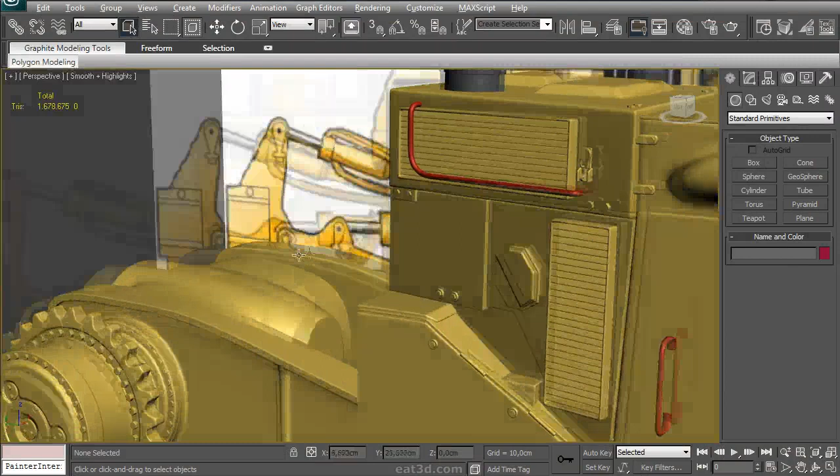In this video, we'll be creating the covers for the track on the side of the bulldozer, below the cabin. As you can see on this reference picture, there are quite a few details attached to it, and we need to create this first before we can start on the cabin, as a sort of base to work on.

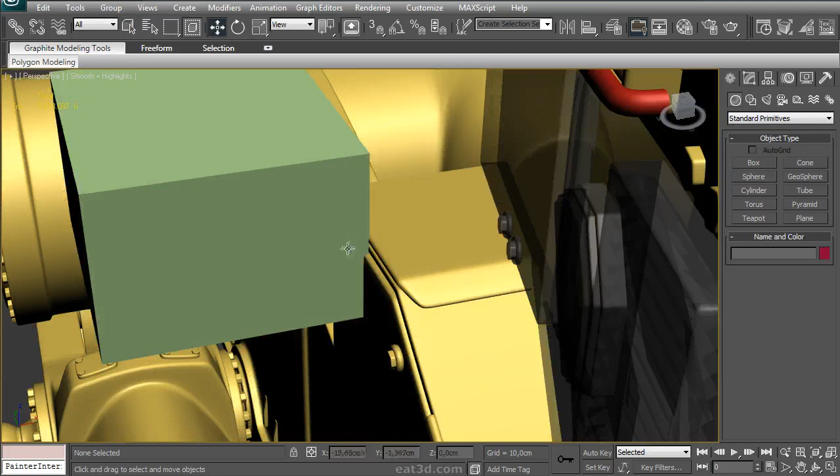I'm going to start off with a simple box shape as a starting primitive, and I want it to sit flush next to the hood of the bulldozer, so I've enabled that again. Then just moving it, and I'm comparing to my block out to see how big exactly this should stick out to the side.

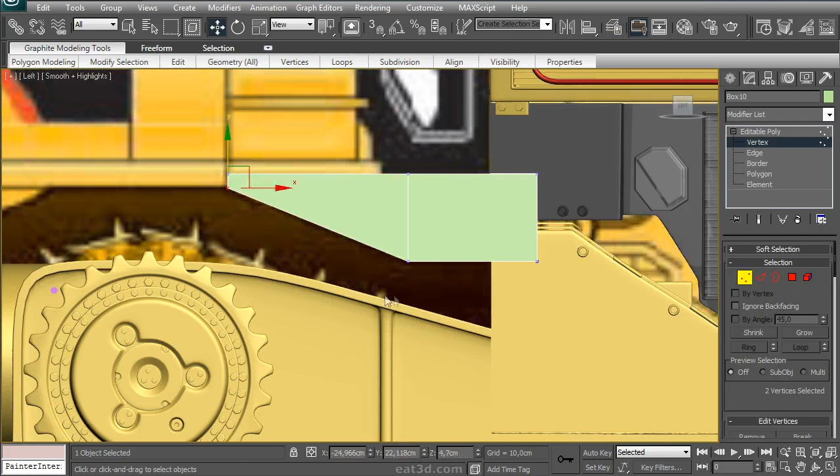Once that's done, I'm going to start doing some simple poly modeling to get the shapes in the correct position. This really isn't anything difficult. It's almost the same as the block out, but this time we're doing it really exact and correct.

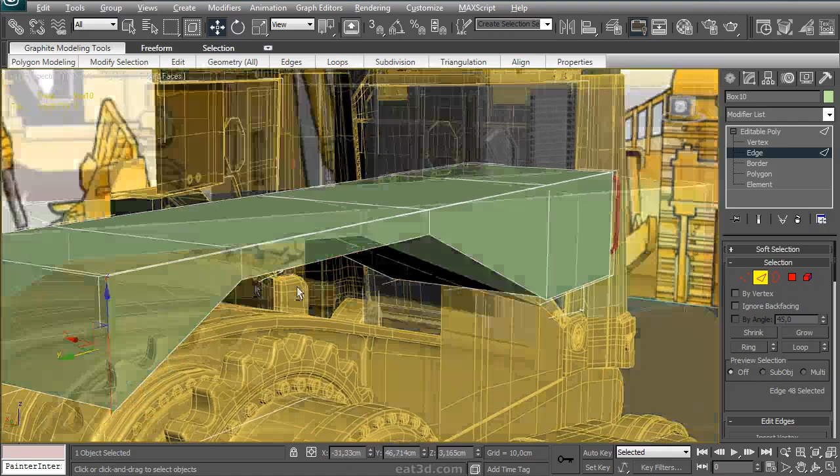After that, I select the sides and duplicate them. Since this part is made up out of a lot of metal plating, I want to build it up the same way in my detailed high poly.

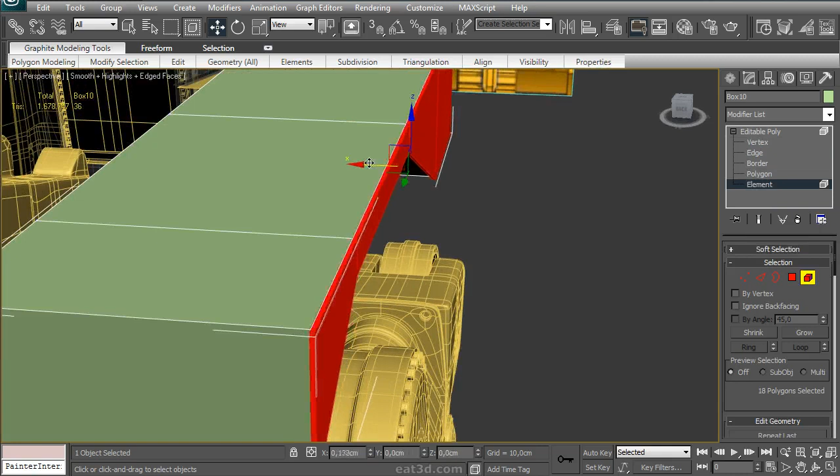So I'm selecting this part and extending the edges slightly so that I can get it to look exactly like metal plating. Then I'm duplicating the inside, and once that's duplicated, I'm moving it and attaching it to this part so that I actually have a thickness on that metal plating on the outside.

With that done, I'm using the Swift Loop tool again to quickly add a few subdivisions, adding these around.

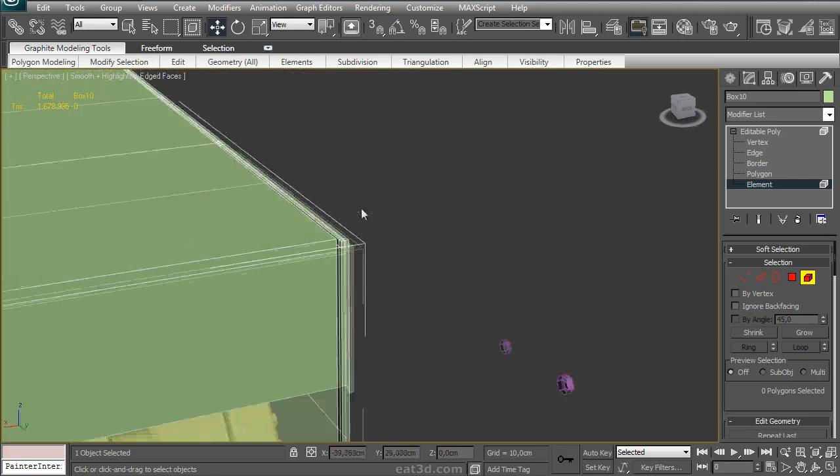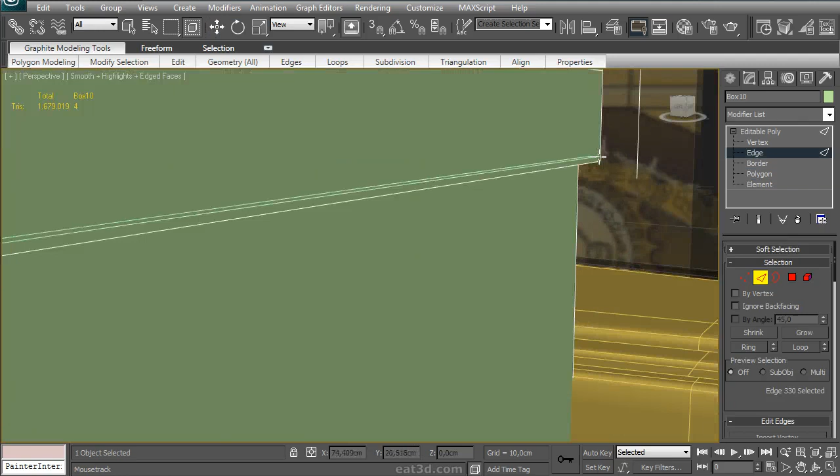After that's done, we're going to do a little detail here at the front. There's a sort of detail that looks like the plate is bent around the front there, and I've created that by simply extruding. Once it's extruded, I'm adding the extra edges that will support the geometry. I'm adding these later in because if I had done them beforehand, it would have been more work and more difficult to extrude.

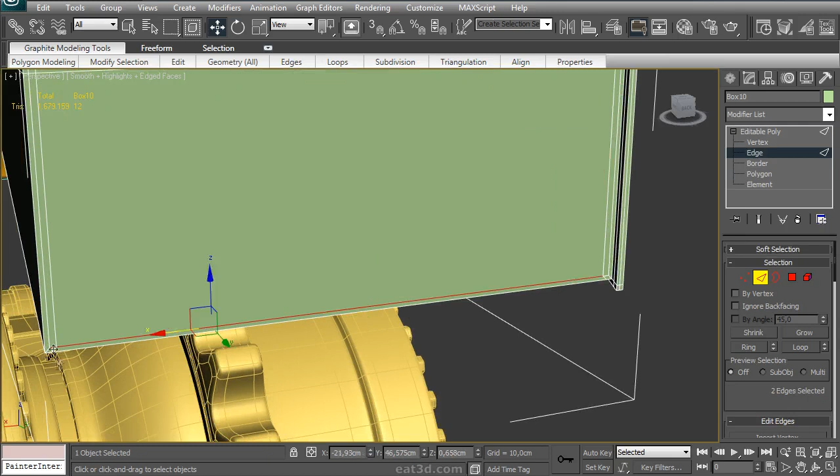Mostly on the back side, because as it currently sits, the back of these track covers is actually open. There's an opening there, and inside that opening the actual rear lights, tail lights of the bulldozer sit. So what I'm doing here is simply adding some geometry so that I can model this in.

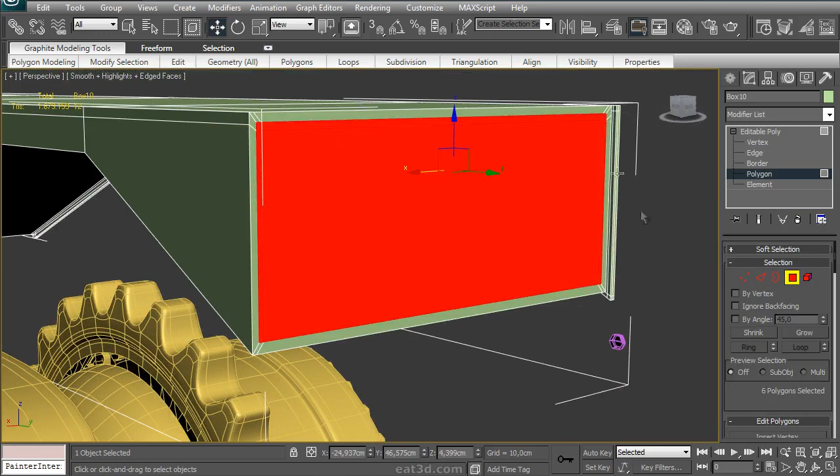I'm just extruding that inwards, then moving it up so that it doesn't intersect with the other geometry.

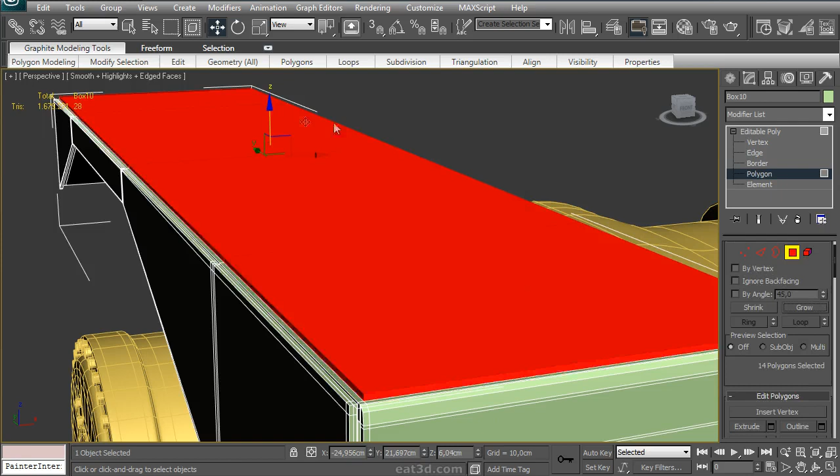That done, there's also a metal plate on the top of this detail part. So I'm doing the same trick here: selecting the polygons, shift-moving them to duplicate them, and then performing an extrude.

Again, on a few parts of these, there's an extruded part that bends over the side. So that's what I'm doing here: using an extrude, a few rotates, and a little bit of scaling, which makes it easier to create that bent-over look.

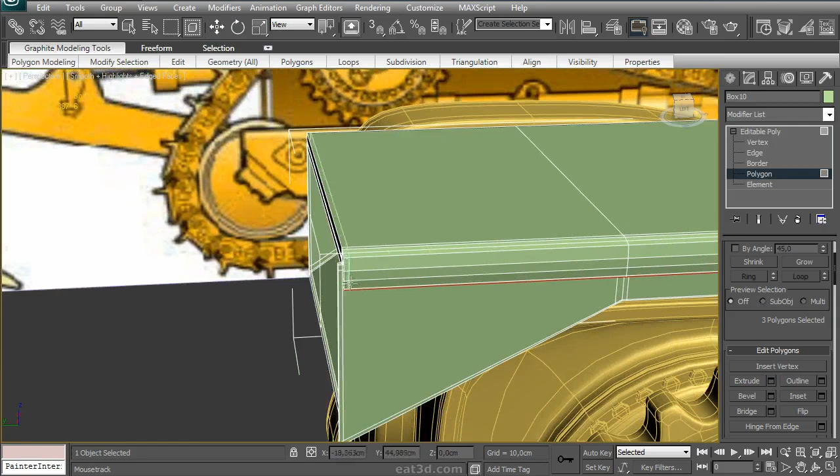That done, I'm adding a few final parts and a last extrude to get the supporting edges in there. After that, I'm using the Swift Loop tool again to add the final supporting edges. This is all pretty simple, you just gotta make sure you do things in the right order.

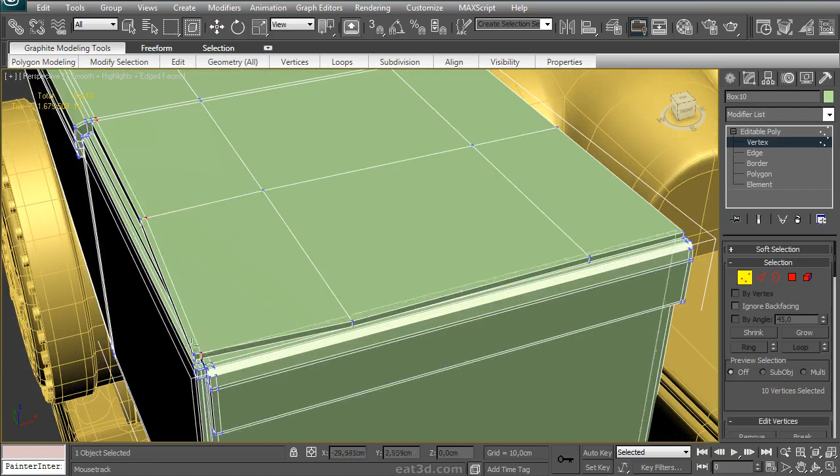One interesting thing I'm doing here is moving a few of the verts around so that it doesn't look too perfect, too tight, and too clean. If I look at the reference pictures, a lot of these plates are just slightly bent, they're not mounted exactly in the best way possible, so I'm adding a few of these details.

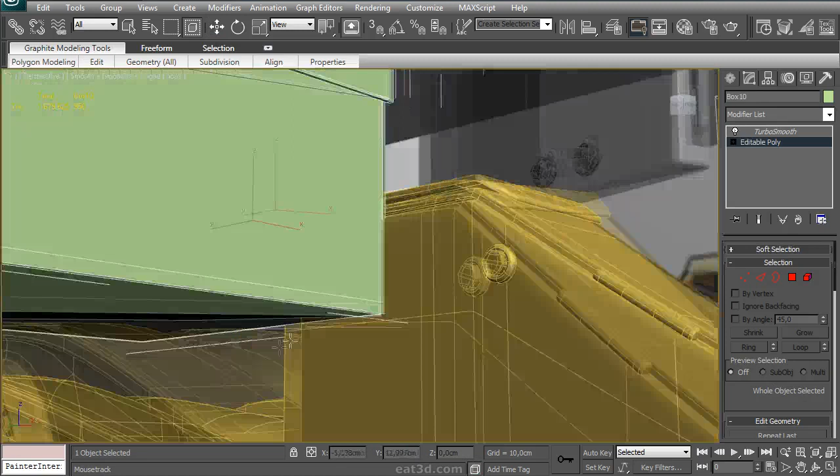There we go, and add some at the bottom. There's an amazing amount of supporting geometry you have to add most of the time, so it helps to use a tool that lets you do this as quickly as possible, and that tool is Swift Loop.

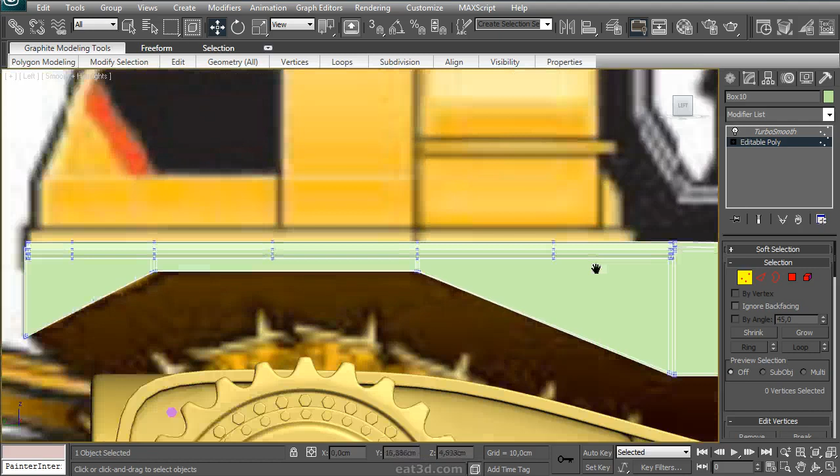Adding a few more here, because I want some subdivisions in there. So I have those selected, I want to move them down a little bit more, just be a little bit longer at the bottom there.

And there's my basic shape, so I'm just going to change the color now. There's quite a few details attached, so I want to create those as well.

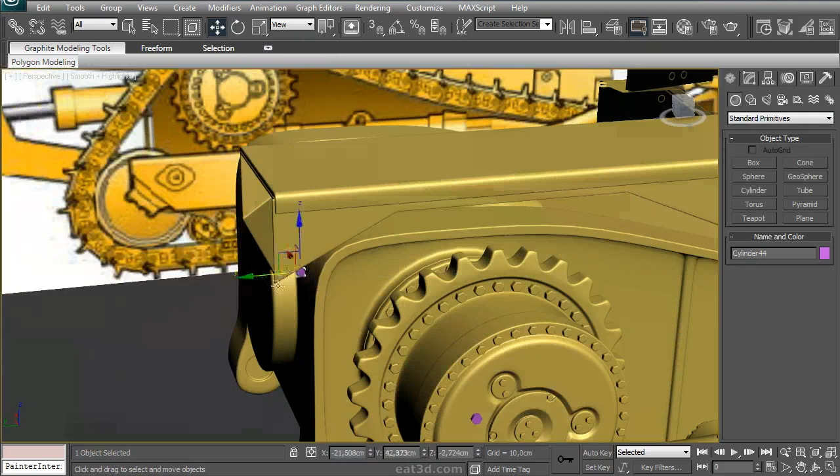We're going to start off with the old favorite, using the same nut model that I've used so many times before. Same trick all over, just duplicating it, attaching it, whatever. You've seen this before.

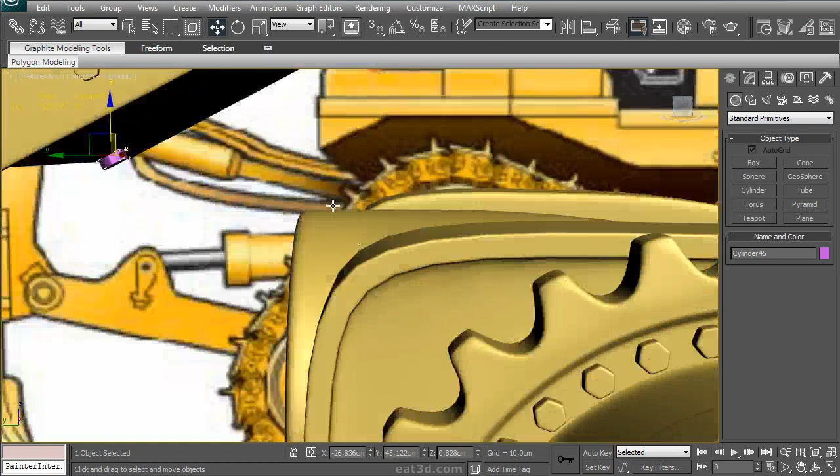The same trick to make it easier to put it on sloped surfaces: just create a cylinder with AutoGrid first, and that way you can get it nicely aligned to your surface. A few random rotations, I think this is important to not make it look too fake.

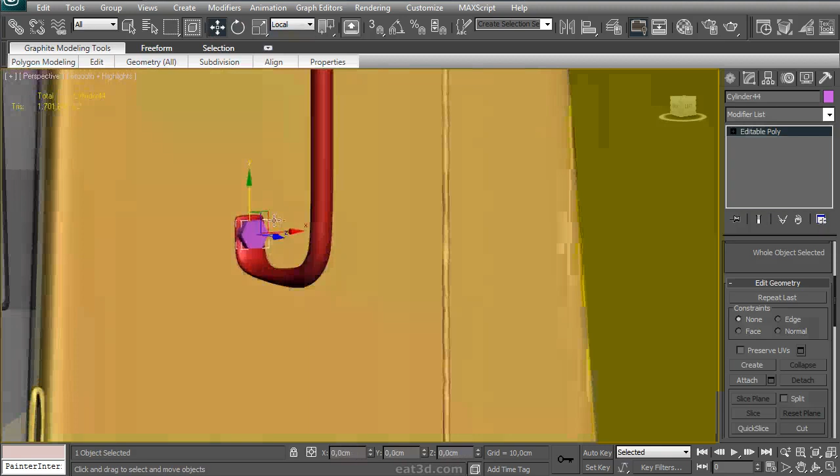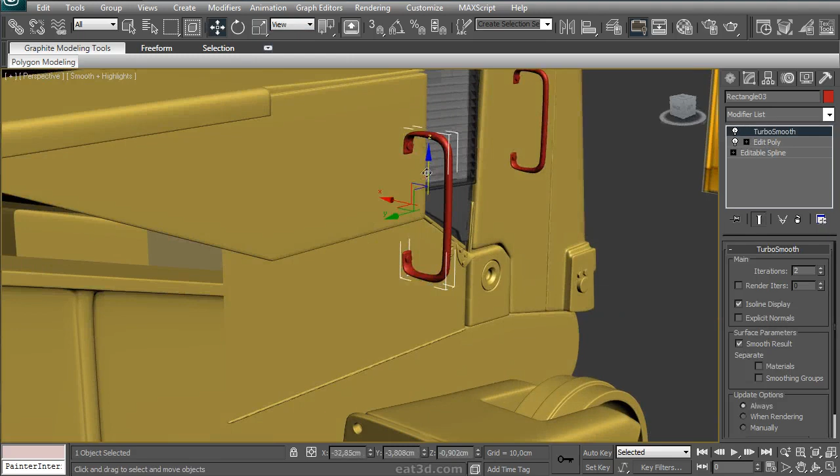I'm going to do another duplicate. I just spotted that on these handles, these bars at the front, there should also be a nut to fasten them onto the hood of the bulldozer, so I'm quickly creating this. I know I'm jumping to another part here, but if you see a detail that isn't right, just jump to it and fix it—don't postpone that sort of stuff. Another reason I'm doing this is I want to use the same handles on the side of the track covers, just modified slightly—they're not as high, and their shape is slightly different.

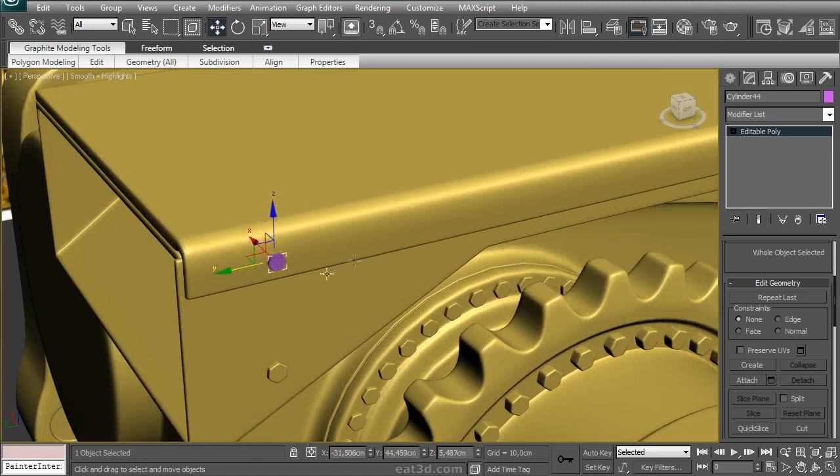The plate that's bent over the side is also fastened with a few nuts, so I'm just going to duplicate these nuts here. Always, when I duplicate multiple times, use more than I'm sure it will need. The reason for that is you can just delete the extra ones, while it's harder to get new ones in there with the same spacing.

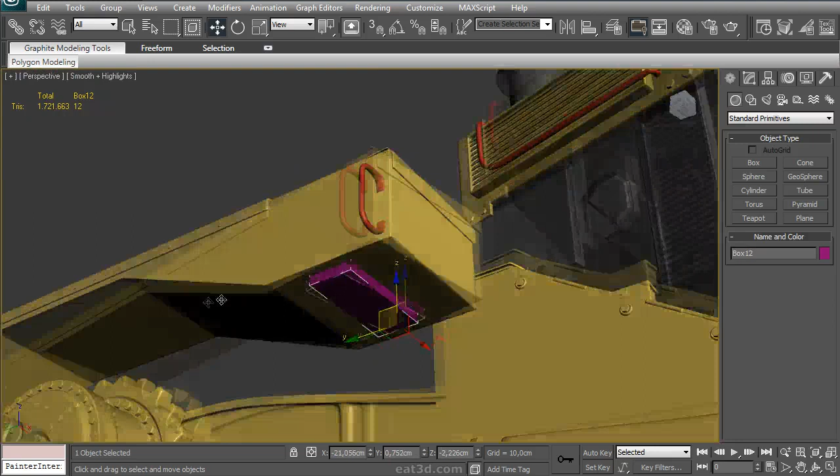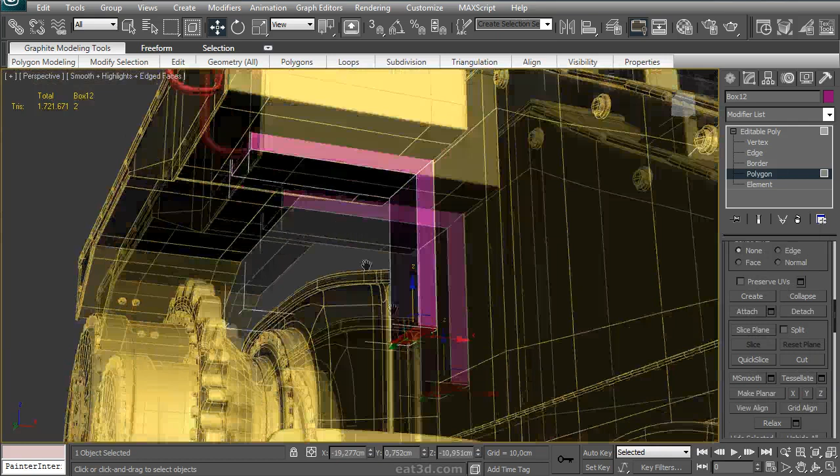Here's another extra part, and what this is for wasn't very clear on the reference, so I'm almost making this up myself. It's a sort of support part that holds up the track covers. They need to be attached to the side in some way, so I'm creating this L-shaped profile that simply holds up the track covers on the side. I'm trying to make this shape slightly interesting—nothing too special, it's an inset.

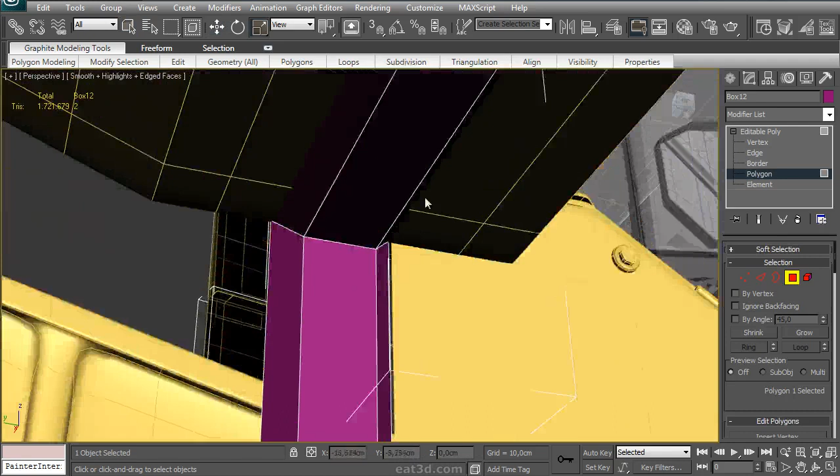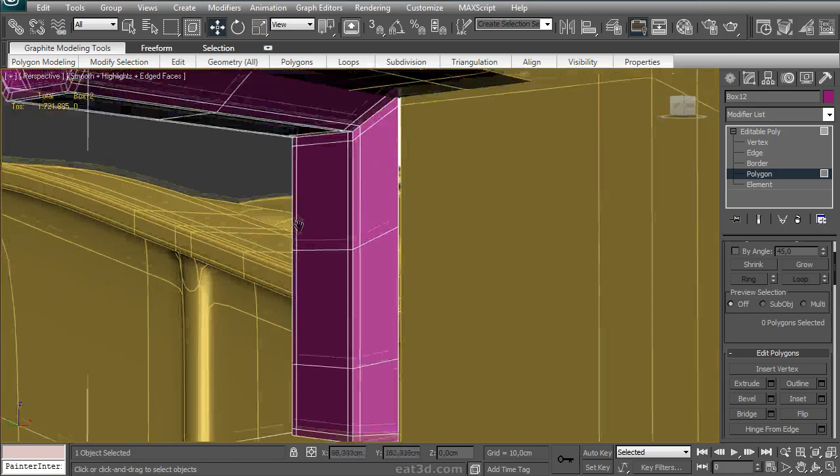I'm deleting these because I don't want to get that rounded shape in there. Move these in like that, then perform an extrude—actually multiple extrudes—and then use my Swift loop to add the extra supporting geometry. I'm adding a few subdivisions here so TurboSmooth doesn't have a problem with the low subdivision of these surfaces, then making a few adjustments to get this shape more interesting—scaling it down slightly, moving it up. That makes it more interesting than just straight on straight.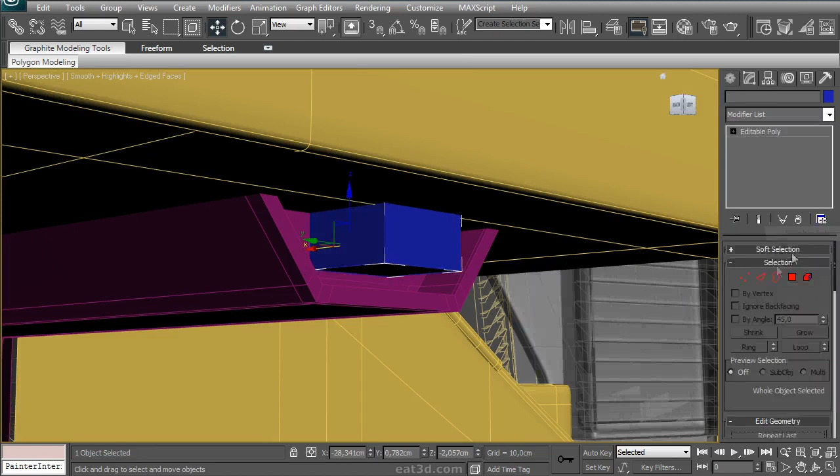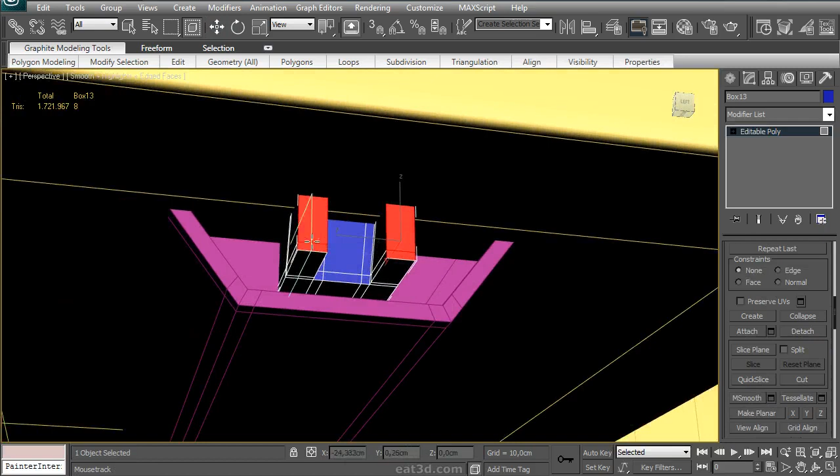As a final detail, I'm adding this small box shape on the inside, deleting the back, moving it in a little bit, and adding a few subdivisions. Move these out, then perform an extrude of 0 and move these manually. Then use my Swift loop to add the final detail to these shapes, and delete the top. With that done, you can go back to the main shape and select and attach that part. So that's our little detail made there.

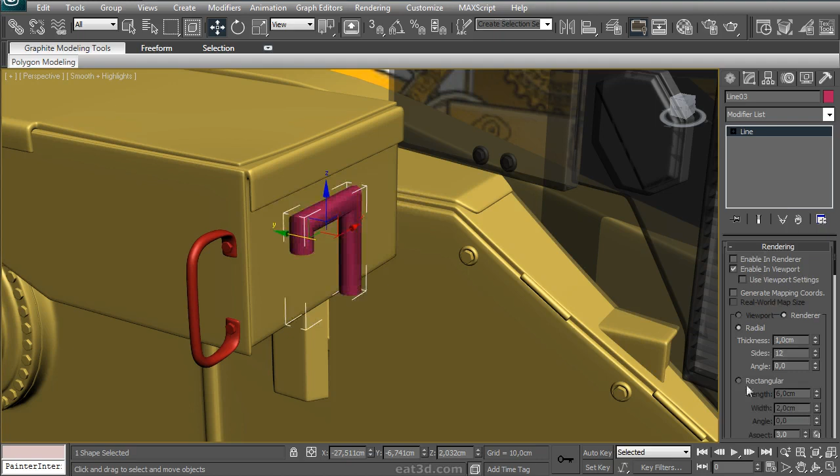Now we also have to create a detail at the front, and I'm starting with a spline here. I've drawn this sort of incomplete rectangle, and I'm slightly adjusting the thickness and width so I can get the right shape out of this. You could do this with box modeling, sure, but I'm just using a spline here because it's quicker in this case for me.

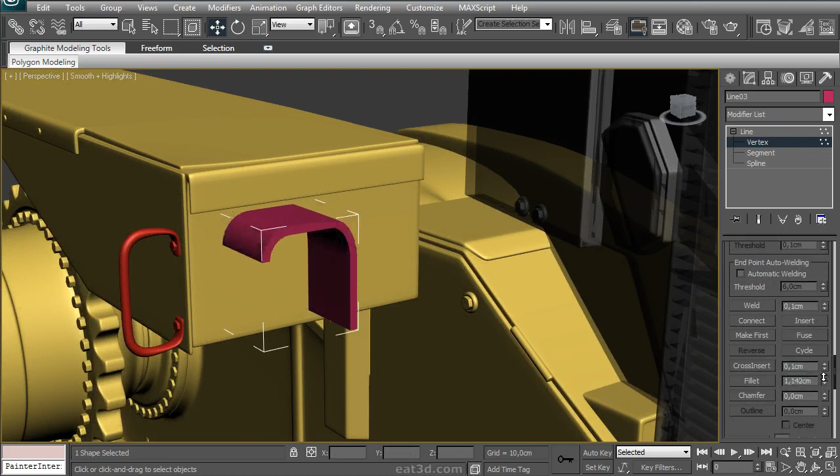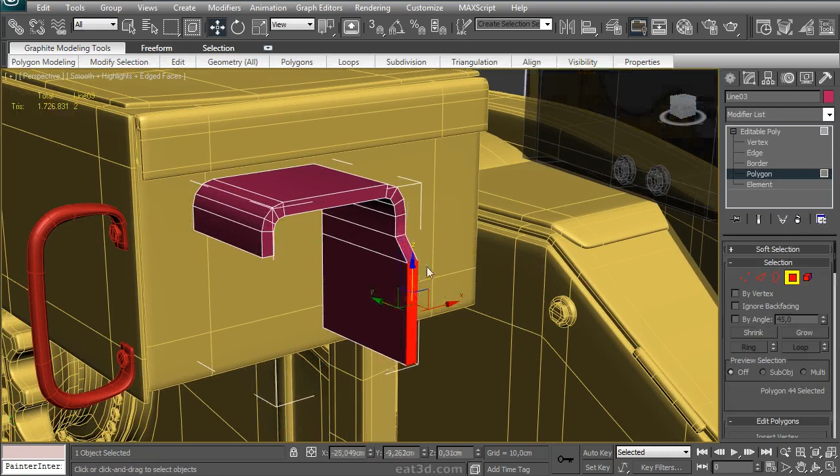You simply select these top points and go down to the fillet button, then manually round off these corners—I think it's just easier. Change a few of these settings, that should be about right. Convert into an editable poly, then add a few subdivisions to edit these. You've got to remember when you create a spline, there's always a triangulated polygon on one side, and you've got to get rid of that. It's kind of annoying, but I don't think there's a setting to turn this off—not that I've noticed in the past 4 years.

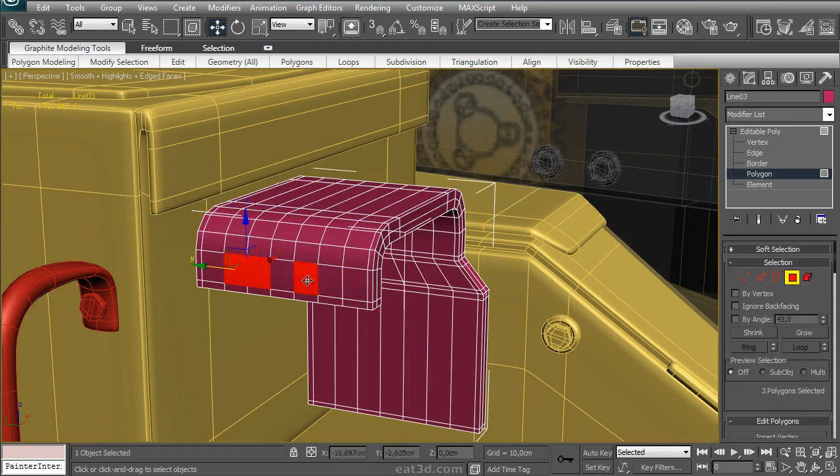So there we are, add a few subdivisions, and this has a specific reason—there are some holes in the side of this part. There's actually 2 times 2 holes, and we're going to create these with the subdivided version. Once I've attached that, you can see those holes at the side. Now this cover protects one of the lights on the bulldozer from, I guess, rain, so I'm going to model the light that's in there.

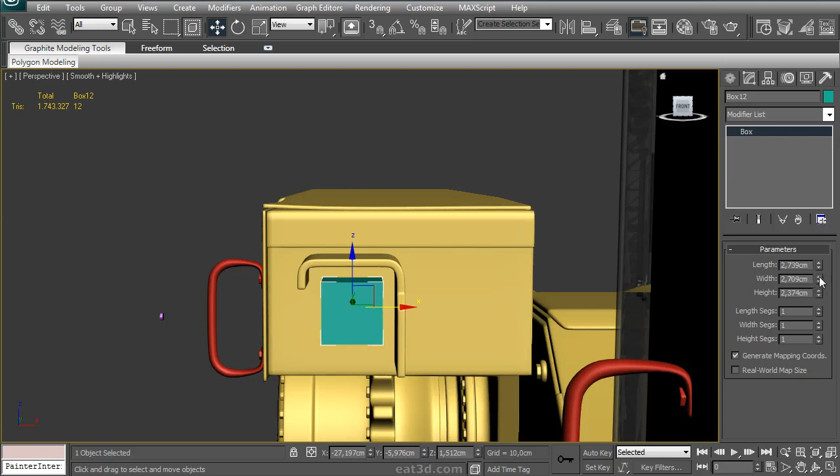This is a pretty simple shape, just a box rounded with a few bevels and insets. I'm using chamfer to add rounding to the box, then just selecting these vertices manually and connecting them. That way we don't have any n-gons, which is better for our subdivision modeling—TurboSmooth doesn't have any problems with that.

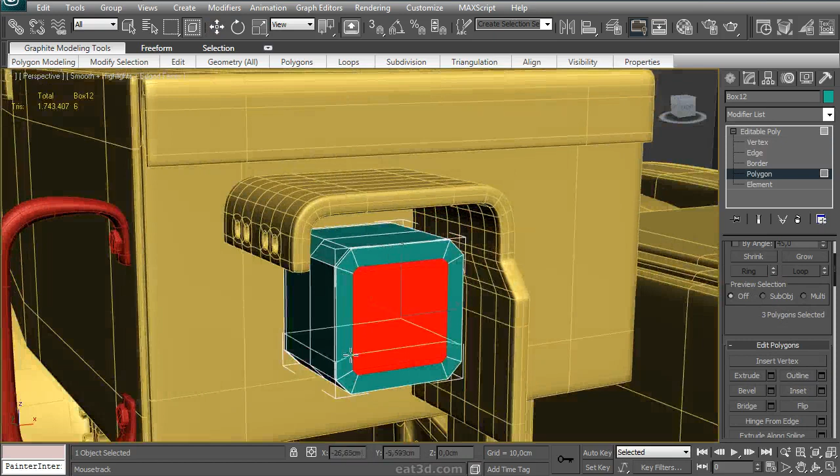Now I'm just roughly adding in a few shapes. As I said, there are a few insets here and there, and this part's actually extruded for this nicely beveled edge around. Then at the front here, we want to give the actual lens part of the light an interesting shape also. All I'm doing here is really simple stuff—just combining insets and scaling.

Now, there are some slight problems when I'm insetting this shape too much, so I'm just using the scale tool to fix that. There we go, that looks better. Once that's done, I can just attach it. There we are.

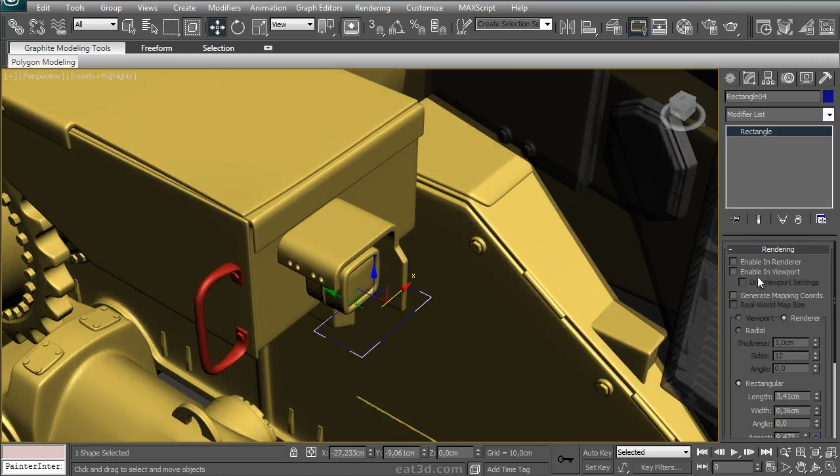With that attached, it's time to move on to the next detailed shape, and there's a sort of protective guard around the front. It's also a good idea to start from the spline here, make it a little bit less thick, and add some fillets to the corners. There we go, that looks about right.

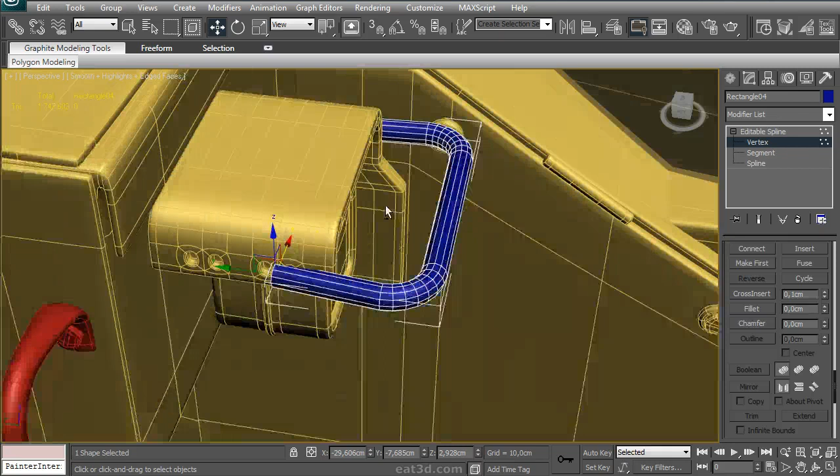Move these in slightly, and reduce the interpolation, and of course the number of sides. You shouldn't have too many when you convert from a spline to a polygon.

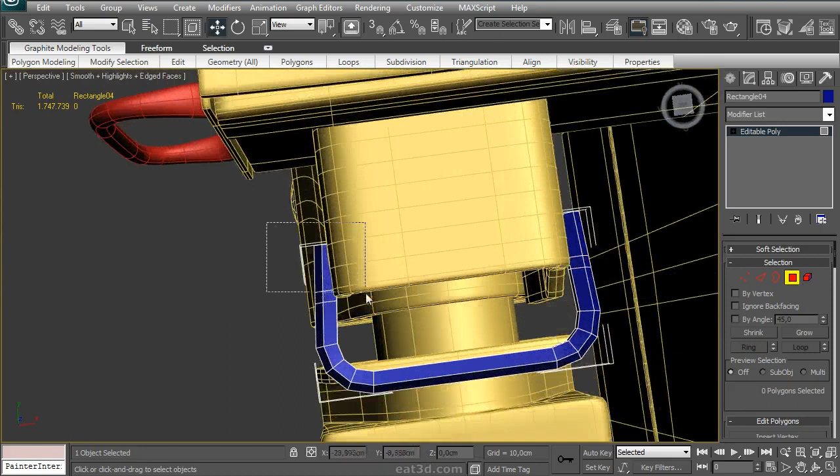I'm just flattening these parts out to reflect their shape in real life. These are bent metal bars, and the ends are sort of squished, which makes it easier to attach them, and I think also more solid to attach them to the main part of the bulldozer.

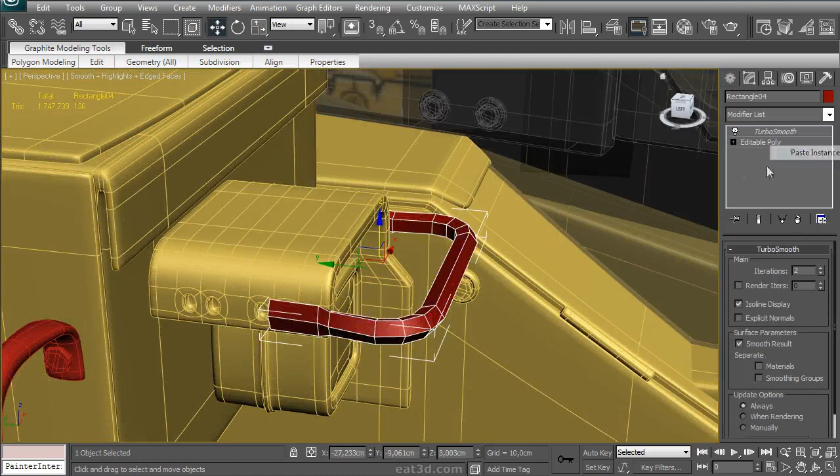With that done, I'm going to scale these up also. It reflects the squishing of the real part. And of course I can't forget to add my supporting edges at both ends. There we are.

I think this could do with being a little bit thicker, it seems a little bit thin. Well, there's an easy way: just add a push modifier and collapse it down, and there you go. Looks a whole lot thicker and a lot more sturdy.

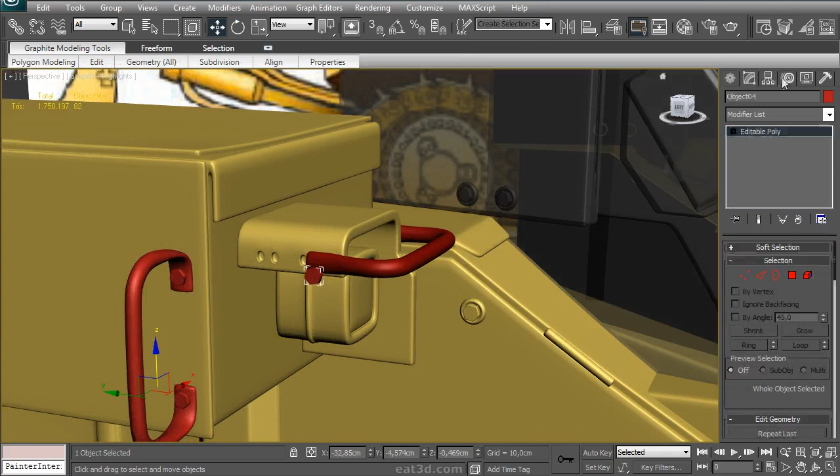That done, I'm just taking this nut and adding it to the same model over here as I did with the other one. I'm going to scale it down slightly. And there's actually two. Gotta make sure not to attach the wrong part.

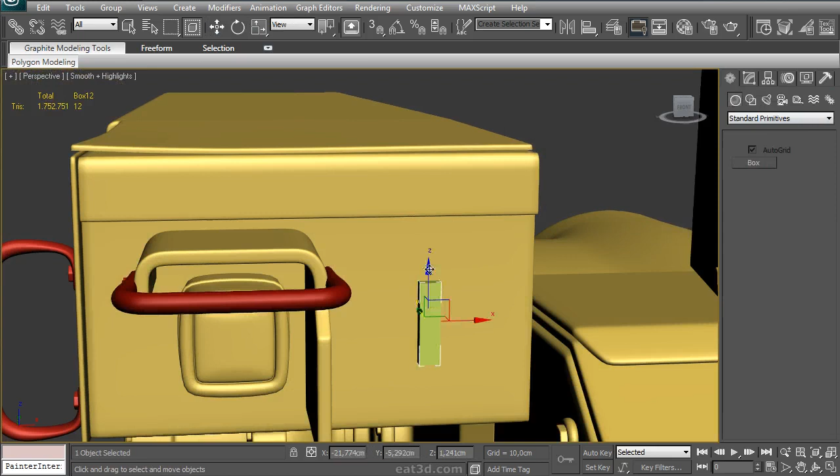Okay, so next up, another detail. This one might look complicated, but it's also built up out of a ton of simpler shapes. I'm just going to start with a box here. It's this sort of hinged lock type of thing.

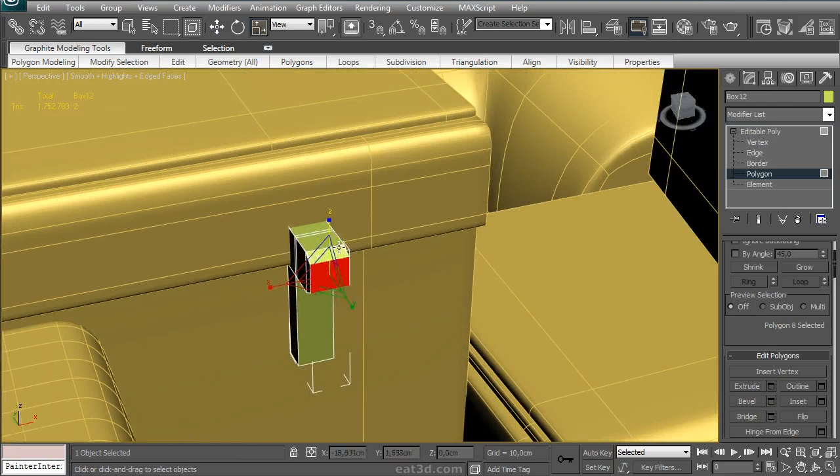There's a hook with a little part that you move over it, and that way I think this is some sort of storage box probably, is closed off. So, simple modeling.

Performing an inset here so that the top gets nicely rounded, then performing an extrude at the bottom, and just scaling those things down nicely. You can see it's a small hinge part.

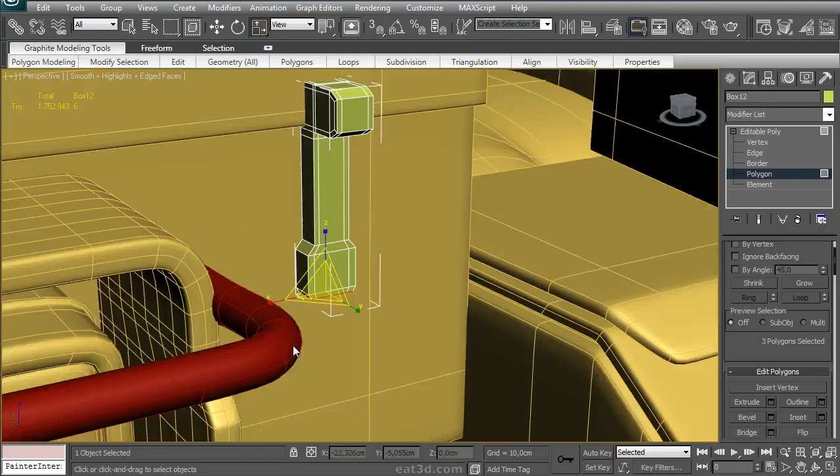So there we go, using the grow selection to move it around slightly. Move that up slightly, there we go. Then we get that sort of bent look.

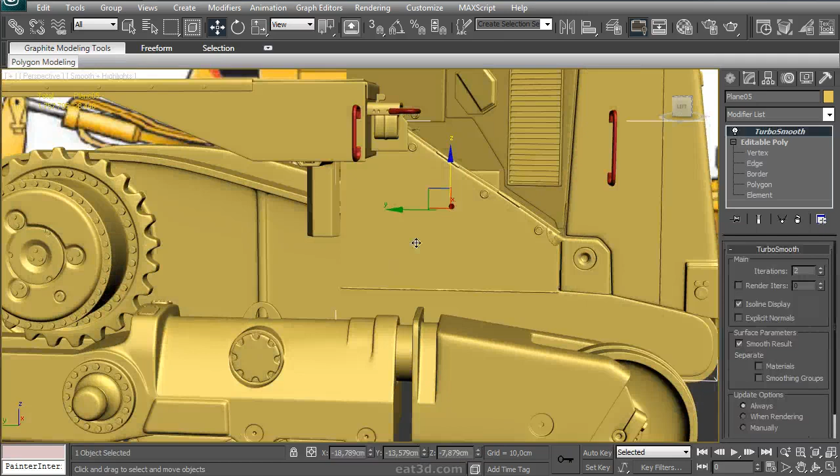And attaching it together. One thing I also want to fix is at the side here, I've added some armor plating, but because the reference isn't very clear here, I didn't continue yet. But now that I'm creating these track covers, I'm just going to continue the armor plating on the side of the bulldozer.

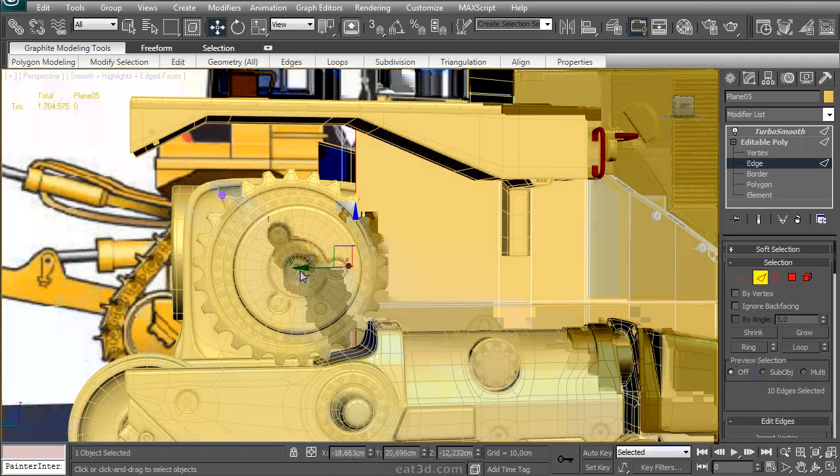So I'm just simply moving out this part, making sure everything's covered. I'm not going to put too much effort into this because you won't see a lot, but it's still got to stay believable. So that's what we're doing here.

Pretty simple in terms of shape, just got to make sure it encompasses the entire area. And I actually deleted that part there. Why did I do that? Well, I don't really feel like...

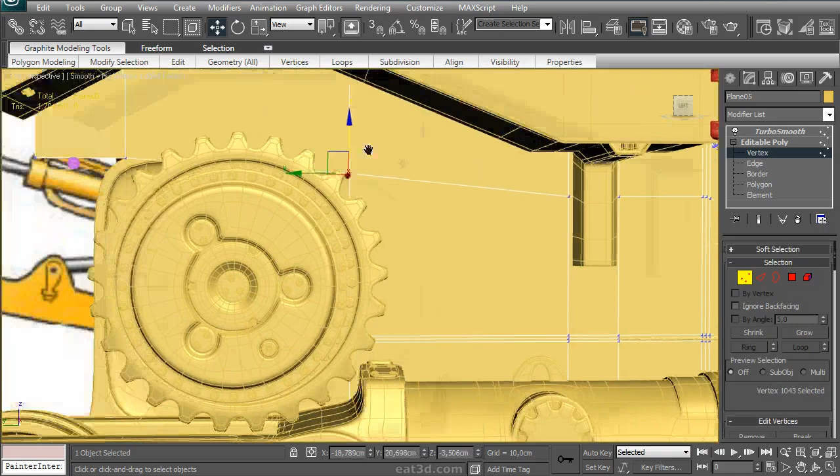modeling something too complex that fits around the extrusion for the drive sprocket. So I'm just going to make the armor plating stop there. I figure that area is pretty solid in real life anyway, so it doesn't need that much extra armor.

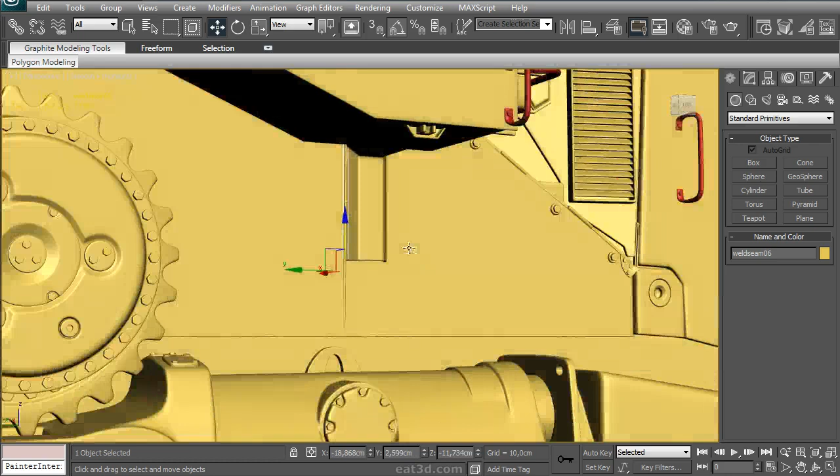And I'm just going to move some of these weld seams around, add a little bit of extra detail. Make sure they go all the way until the edge, that they don't stick out. Use the move gizmo to move them in slightly more.

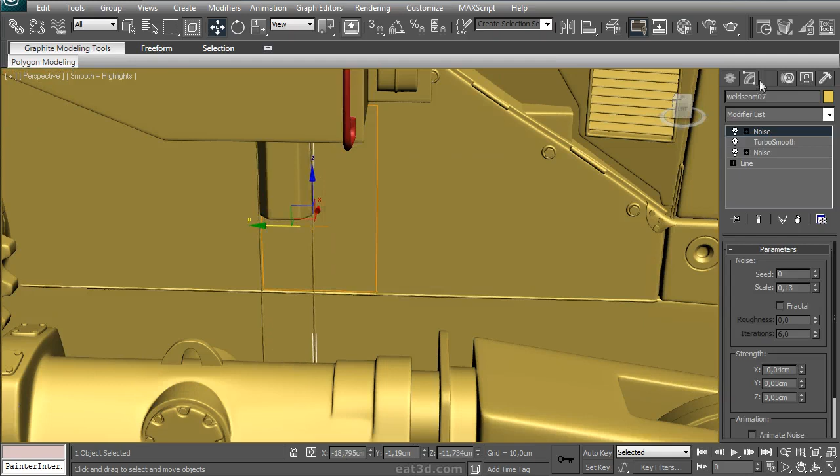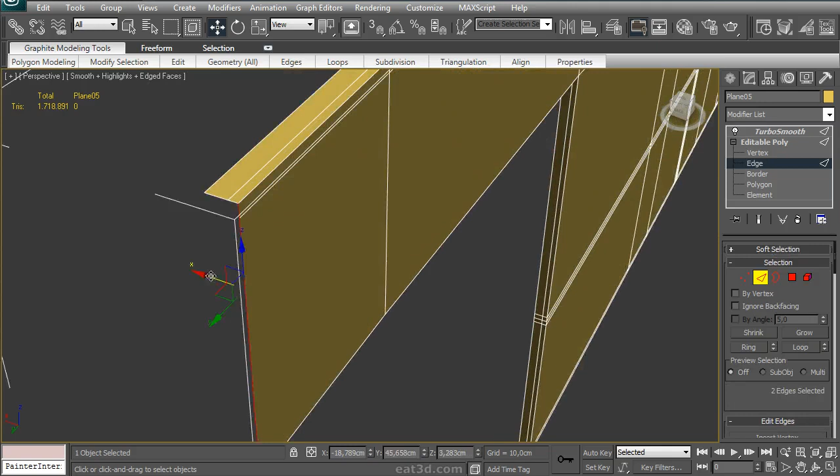Okay, with that done, I'm going to work a little bit more on the armor. I've hidden some parts, and with those parts hidden, I can just perform these extrusions. They allow me to close up the sides of this mesh to make it look like a real thick armored plate. There we go.

It's very simple in terms of shape, but nobody will probably ever see that, so there's no reason to put more work into that. So some slight tweaking here.

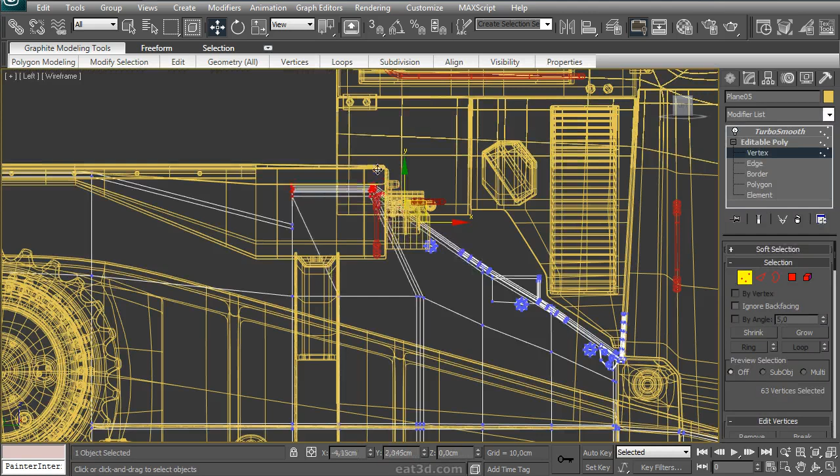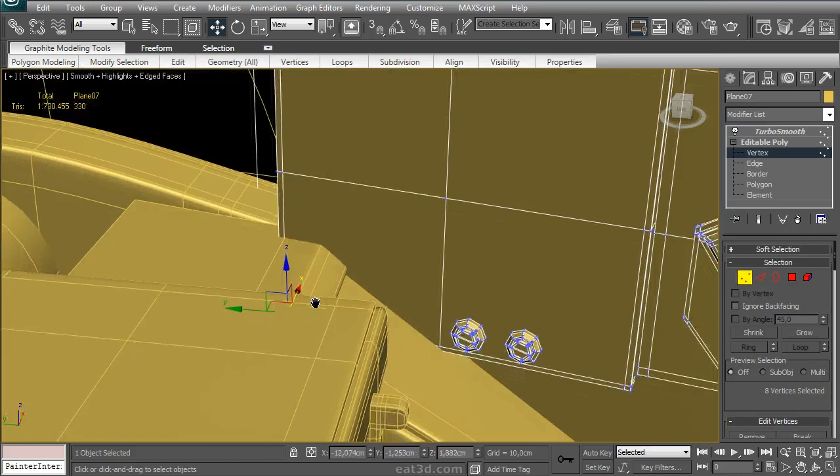I actually noticed that on the reference, the side of this, I call it the triangular part at the hood of the bulldozer, almost meets the top of the track covers that we're modeling right now. So I got to move that around. This is something that you could say should have been done in the blockout, but that means you got to add more detail in your blockout, which means you lose more time with it than you would eventually lose fixing this here. So I'm just fixing it right away.

Anyway, it's not a big problem, just moving it around slightly. No big deal. There we are.